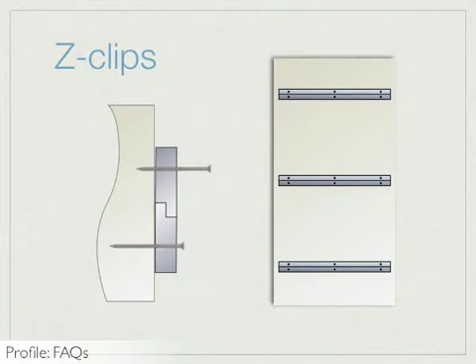To install panels using Z-clips, first, the Z-clips must be attached to the back of the Profile panel. Z-clips should run the entire width of the panel, and special care should be taken with regards to the length and size of the screws used and where the screws are placed so as not to impact the front finish of the panel. Construction mastic or adhesive should also be used to supplement the screws.

A minimum of 3 rows of Z-clips is necessary per 8-foot tall panel. Rows of Z-clips should be situated on the top and bottom edge of the panel, with additional rows spaced evenly between. Also, plywood or solid wood in-wall blocking is required. If you're using panel cleats, then they should be installed in the same way as Z-clips.

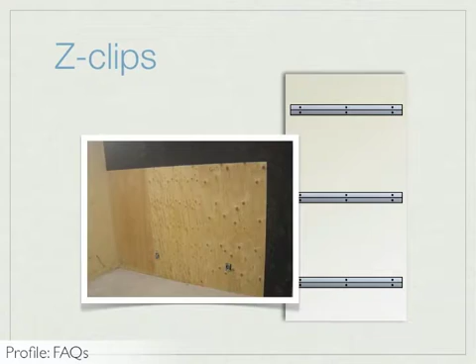When gluing multiple panels together, it is necessary to leave space at both ends to allow expansion and contraction of the entire panel system. Glued joints should only be used on smaller installations of 2 to 6 panels or when using recommended panel cleats. Panel cleats will allow the entire feature to expand and contract.

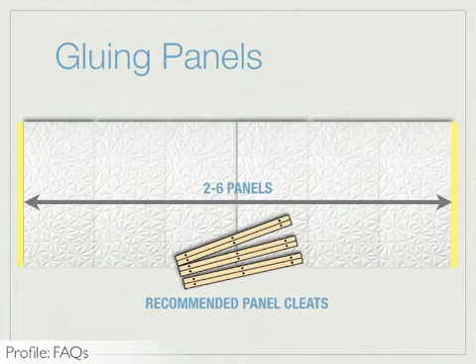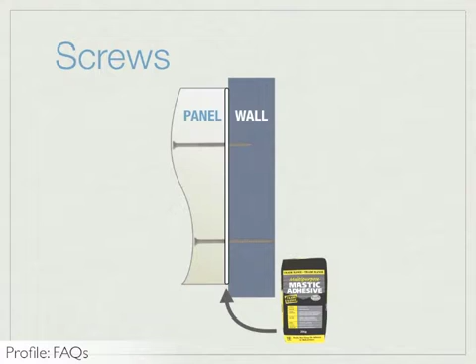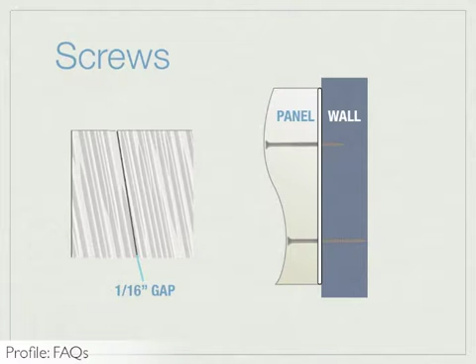Profile panels can also be attached to a wall by screwing directly through the panel. Construction mastic should also be used to supplement the screws. It's required to leave a 1/16 inch gap between panels to allow for expansion and contraction of the wood panels. This technique should only be used on non-wrapped panels that will be painted in the field. Holes in the panel should be pre-drilled and countersunk.

After screwing the panel to the wall, a non-shrinking filler, like Bondo, may be used to cover the holes. Please note that non-shrinking filler should not be used between panels. Instead, a flexible seam filler should be used. You should also note that this method is limited to a maximum of 6 panels.

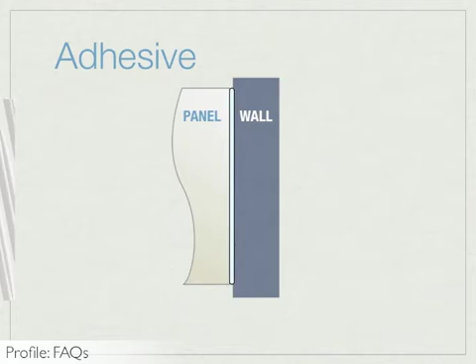If you're using an adhesive to glue the panels directly to the wall, it's required to leave a 1/16 inch gap between panels to allow for expansion and contraction of the wood panels. Alignment of the panels prior to curing is important as the panels cannot be realigned afterwards.

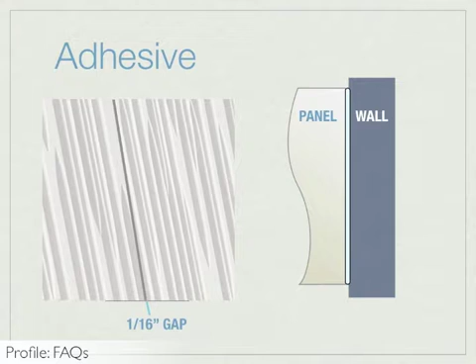An industrial-grade silicone such as Momentive SilGlaze II SCS2800 can be applied to the back of the panels in combination with 3M 4496 foam tape. Silicone should be applied in dots as it needs moisture or air to cure. Again, alignment of the panels prior to curing is important as the panels cannot be realigned after curing. Panel installations more than 16 feet wide should use panel cleats.

There's also a variety of possible ways to install Profile tiles. 3form recommends using 3M VHB 4496 tape to secure Profile tiles to the wall. 3M VHB 4496 is white foam, double-sided tape with permanent adhesive. You should first apply 15 PSI using a J-roller or other application tool. Full cure time for VHB is 72 hours.

To adhere just a small number of concrete accent tiles to a wall where the combined weight is less than 50 pounds, you can use a mastic adhesive to adhere the concrete tiles to the wall. 3form recommends Gunther Ultrabond mastic. Apply the Gunther Ultrabond mastic to the back of the 3form tile, then adhere to the wall.

It's also recommended to secure the tile with tape or something similar until the mastic is sufficiently cured. Be aware that 30% adhesion strength is reached in 24 hours. If the combined weight is over 50 pounds, 3form recommends using a licensed and insured professional tile installer to adhere the tiles. Please reference our Profile Tiles technical document for additional information.

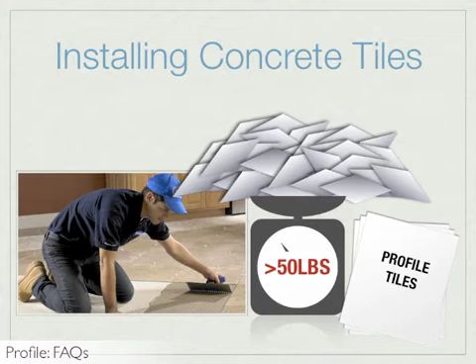If I specify unfinished in the field, how should I prep the panel for painting? The rule of thumb is to sand and prime the panel until it's ready to be painted. This may take more than one round of priming and painting. For ready-to-paint finishes, 3form fabrication uses the following steps, which can easily be replicated in the field.

First, sand the MDF using Norton Contour Sponge Medium Grit. Then dust the surface using an air blower. Then apply Valspar white vinyl up to 4 mils using an airless sprayer and allow it to dry for 25 minutes. After it's dry, the process is repeated. This time use Norton Contour Sponge Fine Grit for the sanding. Remove the dust with an air blower, apply another coat of Valspar white vinyl, and then allow it to dry for 25 minutes. When this process is finished, the product will be ready to paint in the field.

We recommend a water-based paint, such as a latex paint, although some solvent-based paints such as lacquers can also work. Finally, be aware that 3form does not offer an on-site painting service.

What if I don't like the seams? What are my options? In many cases, the strength of the pattern can effectively minimize the seams. However, there are more options to address the paneling. The customer can specify the pattern to run parallel to the seam on the 96-inch side. This method can hide the seam really well.

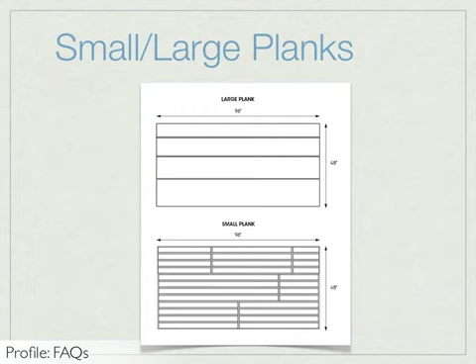Another method is to specify the panel in either small plank or large plank. This way, with the 4x8 panels in smaller pieces, the seams will become part of the design. Lastly, panels can be specified as unfinished. Then, after installation, the seams can be finished and painted for a seamless application.

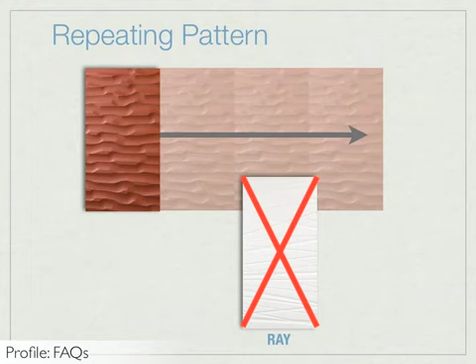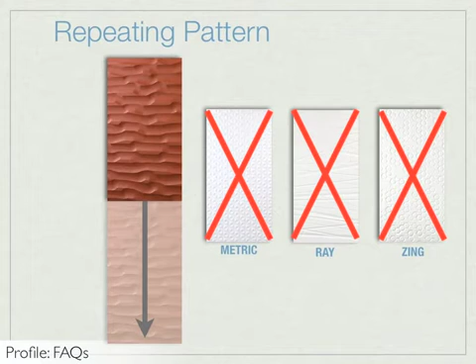Does the pattern direction repeat in panels? The answer to this question is yes, in most cases. All of the patterns except for Ray are designed to continue horizontally along the 4-foot dimension. In addition, all the patterns except for Metric, Ray, and Zing are designed to continue vertically along the 8-foot dimension. It may also be helpful to note that the Metric pattern can be modified to continue in the vertical direction by cutting down the panel slightly.

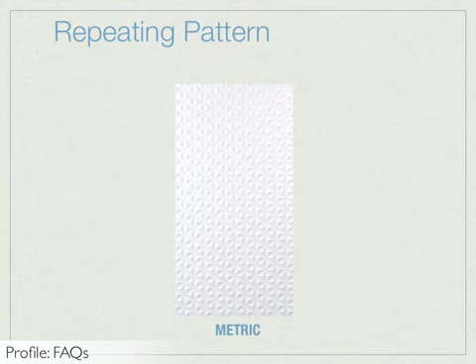Can Profile be cut by 3form to fit to my exact wall or ceiling? Panels can be cut down to fit a specific measurement with a small price premium. Tiles, on the other hand, are a modular grid system and therefore can only be fitted to the nearest full tile size.

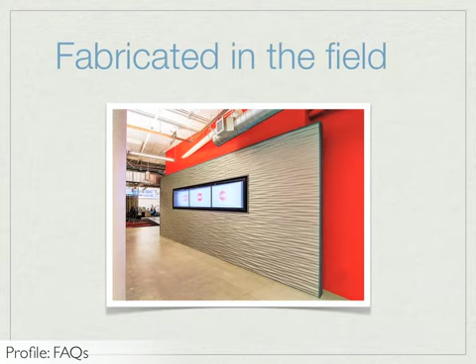Can Profile be fabricated in the field? Profile can be fabricated in the field to accommodate custom dimensions. However, if this is the case, it should be specified as unfinished for post-manufacturing fabrication. Then, after the on-site fabrication is complete, the product will need to be sanded, primed, and finished.

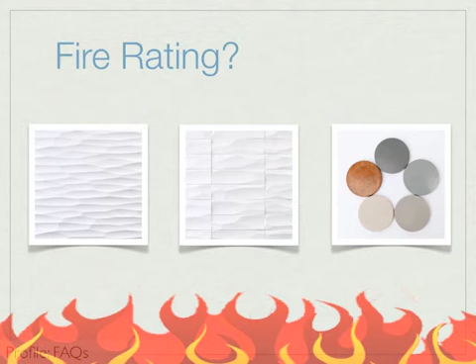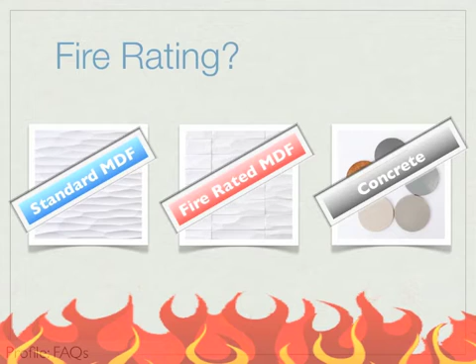What is the fire rating of Profile panels and tiles? Well, when it comes to fire rating, there are 3 specifications that are available: standard MDF, fire-rated MDF, and concrete. Each specification has been tested for flammability and smoke with the ASTM E84 standard, and the results were quite good. First, be aware that standard MDF that is unfinished does not qualify for a fire rating.

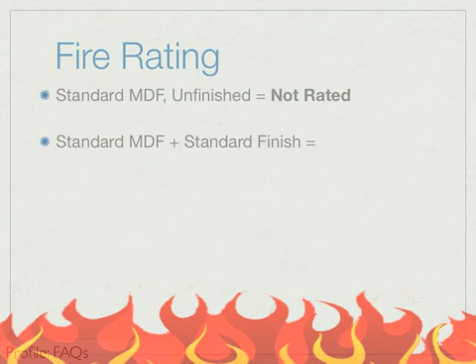However, standard MDF with the standard finish, including the felt finish, received a Class B rating. Fire-rated MDF with the standard finish received the Class A rating, and the fire-rated MDF that is unfinished also received the Class A rating. That's pretty good. Finally, be aware that concrete is non-combustible.

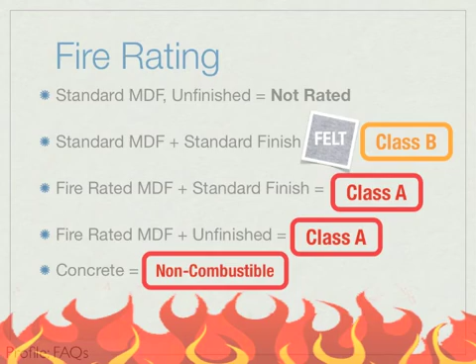Where is Profile manufactured? If the customer orders a ready-to-paint finish, then the material will be manufactured out of Salt Lake City. Otherwise, Profile tiles and panels are manufactured in our locations in Florida or in Oregon.